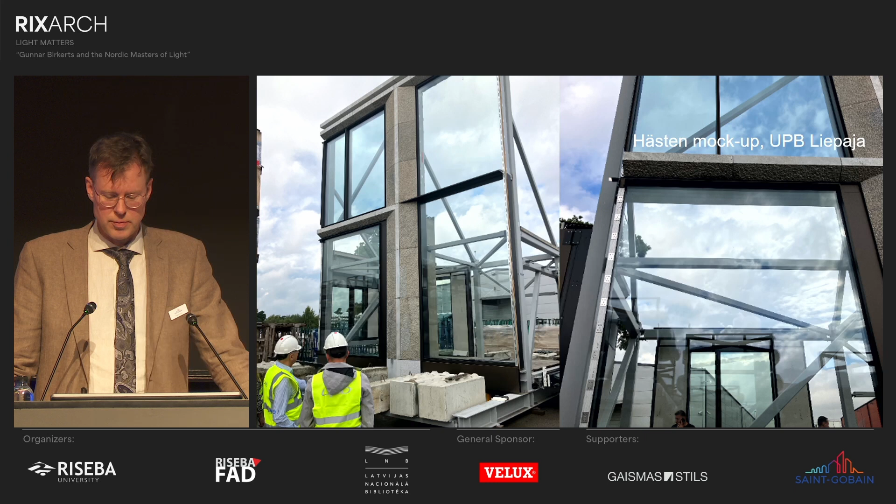So next question, can we rely on just one supplier? I mean, I worked for the same supplier for 26 years, and I get paid every month, so yes, you can.

We sell to glass processors that make the insulating glass units for the houses. And all these companies around the Baltic Sea are companies that buy our products. So you can get offers from multiple sources, even if you use just one glass supplier.

So moving on to science and number crunching. This is the not so fascinating part with not so many pictures. How do you create the combination of daylight and thermal comfort? Well, first, glass is about spectrophotometrics. What wavelengths do we transmit and which ones do we reflect back? And then you need to think about the different types of radiation.

What we emit here today is we're black bodies between -50 and +100 degrees by definition, and we emit very long wave infrared energy with low efficiency. And that's what we're trying to stop from getting out of the house.

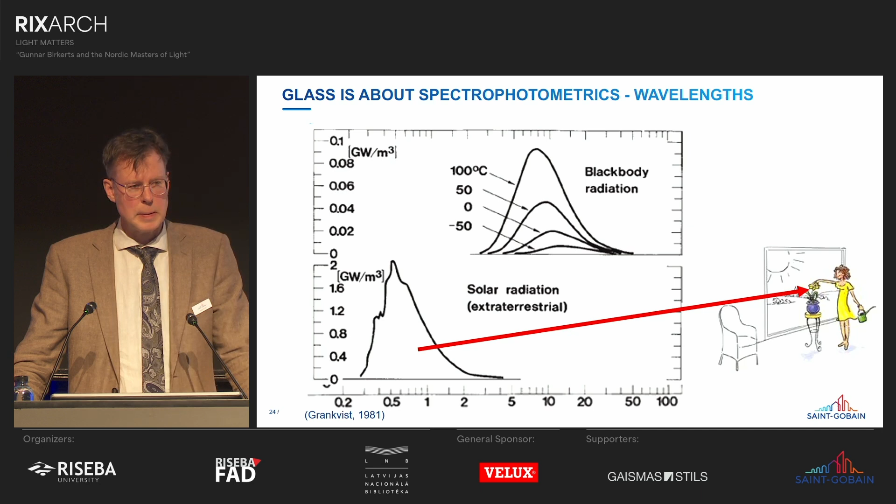What we try to stop from getting into the house is instead the solar energy, which is a black body at 5,500 degrees. More than half of the energy from the sun is invisible. It's infrared, it's heat. But it's not the same infrared as what we're emitting. So it's completely different energies, and we need to handle them differently. All the glasses that I show here reflect back this energy by 97 to 99%. So it's not really the problem anymore.

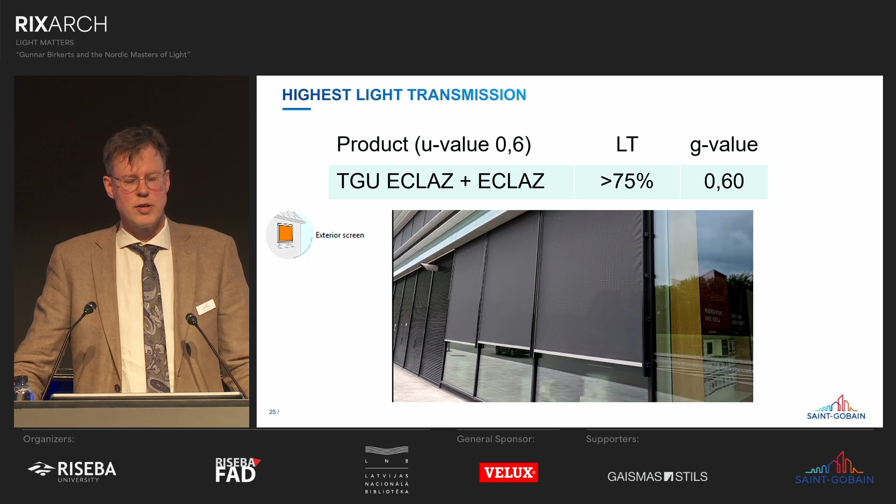If we start out by focusing on getting the highest light transmission, we're at about 75%, a triple glass unit that lets in a lot of energy. If you remember the spectral curve from the sun and compare it to the spectral curve of this glass, you see that everything goes through, and it brings really nice colors. The bad part is that you need outside shading, at least in the south, east, and west, to control the energy.

So what other solutions are there? Well, solar control glass is something that I like, as I said before. And the lightest one nowadays has more or less the same light transmission that we had in standard low-E glass some 10, 15 years ago. So that can be used, and this glass I use a lot in schools in Sweden.

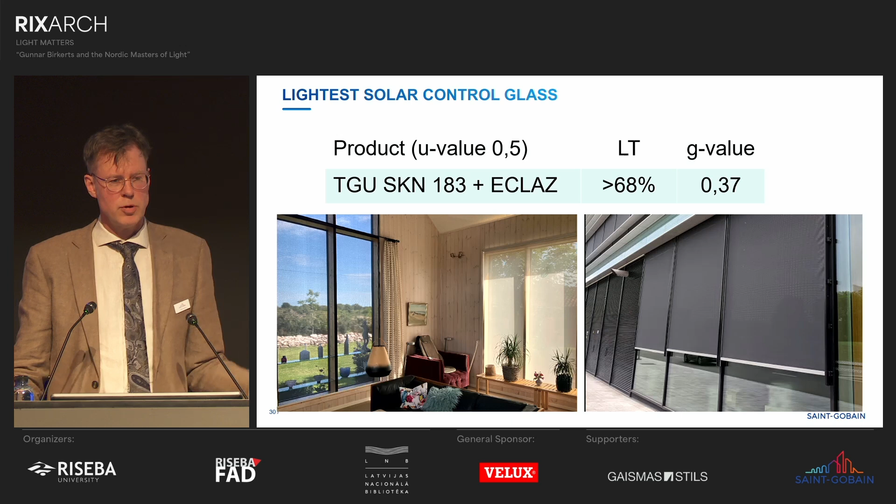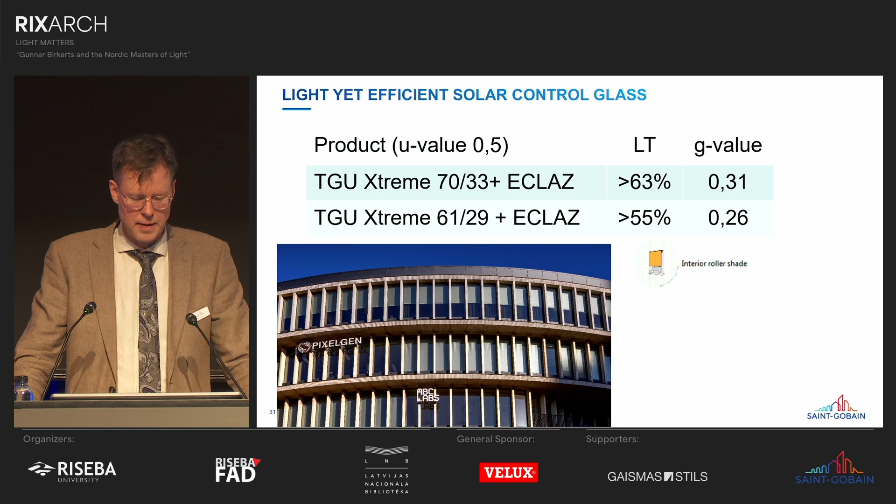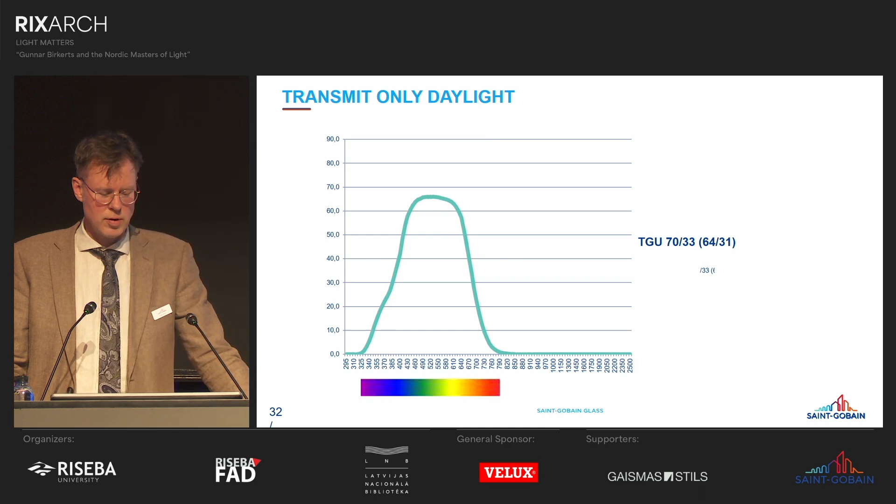And then moving to the glass plus inside shading, which I will get back to a bit. You go down further in light transmission, but you also go down a lot in energy transmission. And you create a glass, if we look at the spectral curve, where the transmission is actually only daylight. There is, of course, convection and stuff, but the way the coating is designed, it only lets through daylight. And that has an interesting effect on the operative temperature.

Here I sit the first time behind Xtreme 70/33, and I say light without heat because it's 26 degrees outside on this day. And I'm getting a reward, and I'm being interviewed. It's COVID, so it's recorded. So I have my 15 minutes of fame. I'm sitting there for like 15 minutes.

And I don't really sweat, because the infrared energy from the sun is gone, which means that I can actually endure it for quite a while. So basing facade solutions on this type of modern solar control glass makes them more resilient. So it's not like immediately when the curtain is gone, it doesn't work anymore.

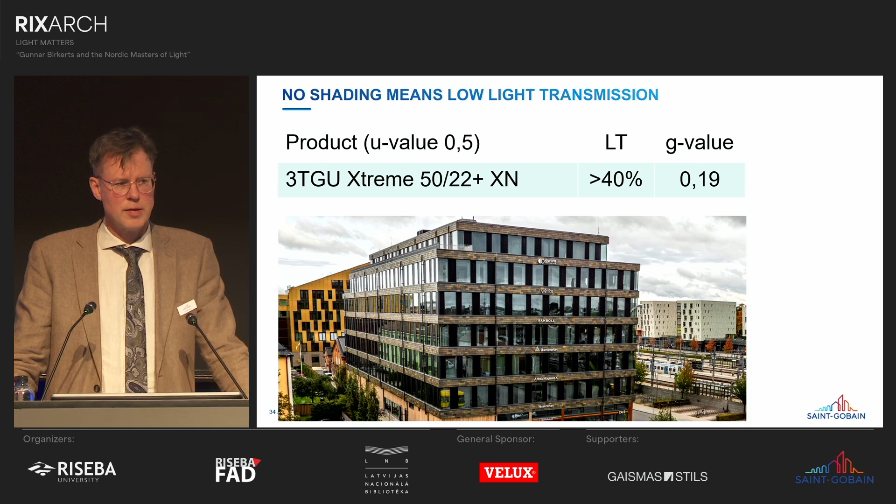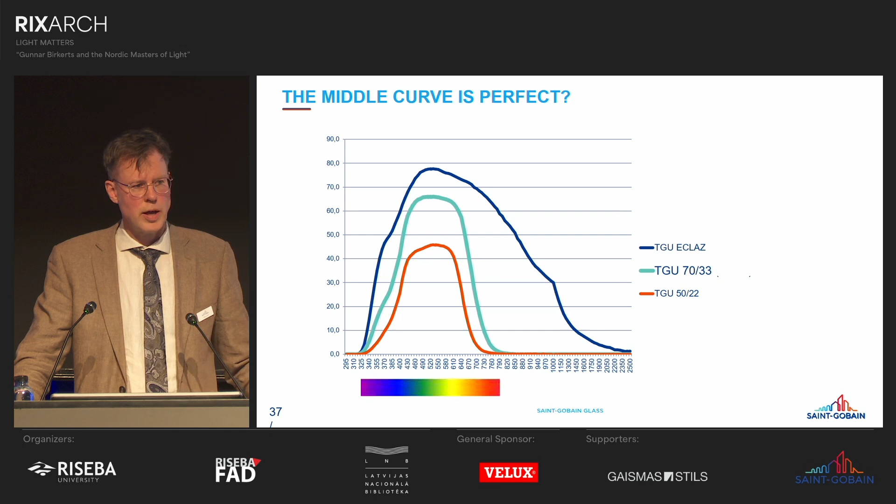By taking away a little bit of daylight, you take away a lot of heat. And then if you want to continue to take away heat, you do that only by taking away daylight. So I use only 3 things in my life, at least my working life. And it's these glasses, so you can have like a falling range of light transmission, and then you'd need different tools to control the heat.

So outside shading, exterior screen, is not big science. Anything you hang in front of a window will block out the heat. Inside shading is a bit more tricky, and I treat it in my next slide. It's been done with the help of Equa Simulation.

It's a building simulation software producer in Stockholm that produces the software IDA ICE, which some students use in Latvia. And it's also used a lot in Scandinavia, Finland, and DACH. It was actually founded back in the 1950s. The first software was written hoping that one day a computer would be purchased to Sweden. So the roots are deep, and it was made to sell these mechanical ventilations that came back then with heat recycling.

In the most modern versions, you can calculate wavelength by wavelength what energy goes through the glass, what energy is then reflected back from an inside shading. And when you do that in accordance with the European norms, you can see that you actually cut the energy transmission in more than half. There are some drawbacks to this theory, but it gives a new way of treating the energy.

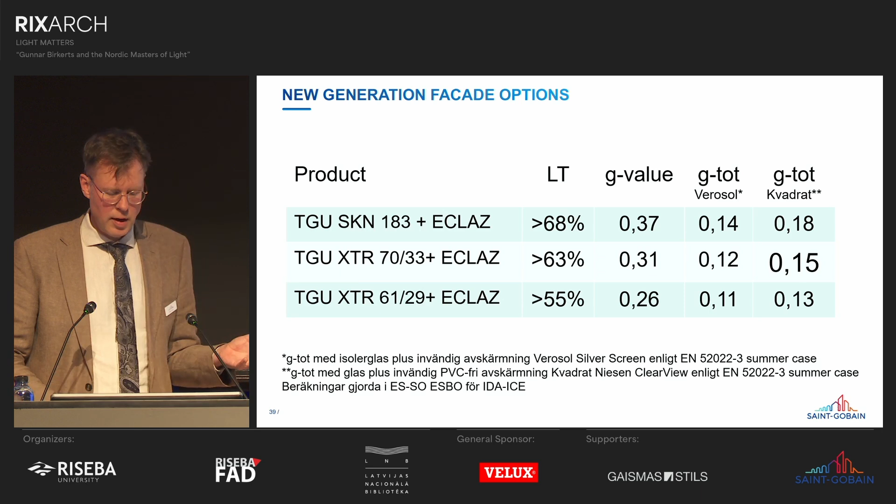And I have made it slightly bigger, the 0.15, because a consultant friend told me if you design a room that cannot sustain 15% of the energy from the light coming in, then either your window is too big or your room is too small. Also, I have two different products. They're the most efficient on the market. They're not Saint-Gobain products. The most efficient is with PVC, and then the next one is without PVC. So that's also a choice to be made.

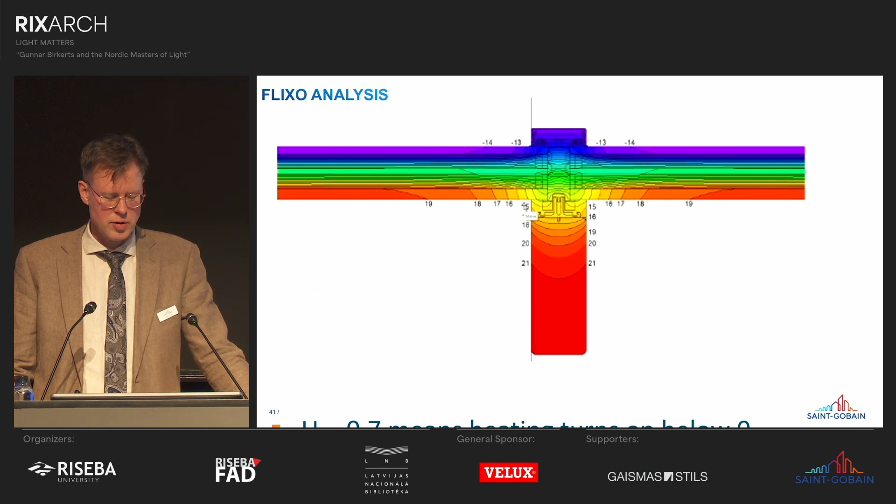Moving on, I don't see a problem in making a facade that can sustain winter cold. So thermal comfort in winter is more or less solved if you use the right combination. So I will skip to this slide to show the Magasin X in Uppsala, which went into use 5 years ago. And you can see the glass. You have either 900 millimeters wide or 1800 millimeters wide and 3 meters high. So that means that you have very little frame compared to the glass.

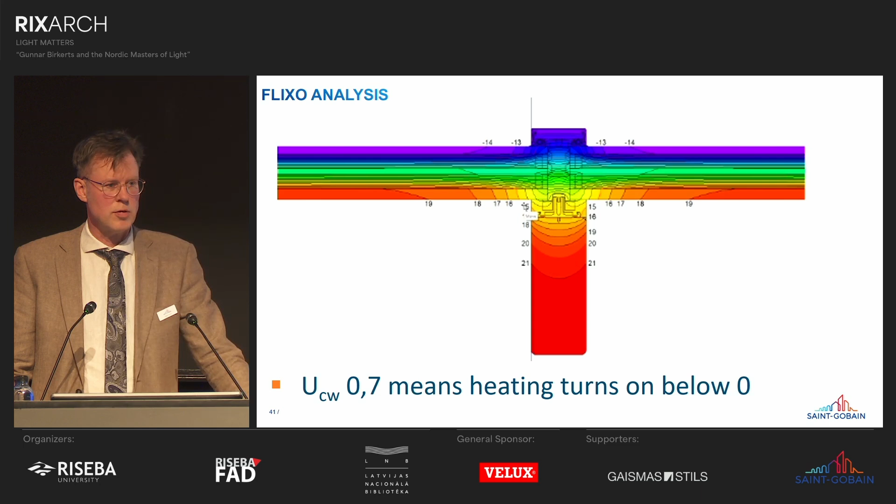And then you can make what's called a Flixo analysis to see in every point the outside temperature and the inside temperature. And this is important because when you drop very low in the U value for the facade, the heating does not turn on until it's freezing temperatures outside. So any cold bridge will become a problem because it gets the air circulating, and you might have to increase the temperature in the room by several degrees just to counter that. So cold bridges are a thing to be avoided, and small windows are not sexy.

So what does influence the window-to-wall ratio? Well, I say orientation, room size, and cooling. And I want to give a few examples to that. First, Regionens Hus in Gothenburg. It has, of course, 70-33 glass and inside shading. And it also has a cooling system based on air that can give comfortable cooling at about 20 watts per square meter.

The office space is 7 meters deep, and that's sort of a standard in Sweden, and I think international, to have 7 meters office space, 5 meters of meeting rooms and kitchens, and then 7 meters of office space. And the equation brings about a 40% window-to-wall ratio seen from the inside. This is how it's seen from the outside. Two things to notice. You don't really notice the inside shadings, and when you bend the glass, it actually becomes a lot more reflective because it reflects so much more of the surroundings.

So 40% is a bit small, 60% is better. And this is Merkurhuset in Gothenburg, which had the same prestigious award 2 years ago. I won it 2 years straight. It has what's called cooling baffles, water-based cooling, and then you can go to 40 to 60 watts without having problems with draft and stuff.

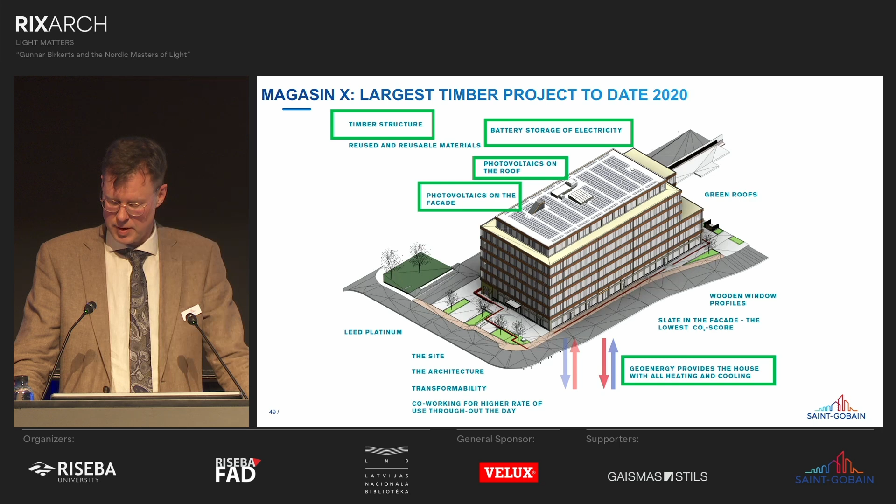What actually drives the whole system is the geothermal part. It's like 30 holes, 350 meters deep. So they take care of the heating in the winter in a quite good way. But they also help out in the summer. And here's a bit of a complex diagram where you think surface. So the surface in the outer circle is consumed energy. And here you see consumed energy for cooling. Ooh. The inner circle is purchased energy.

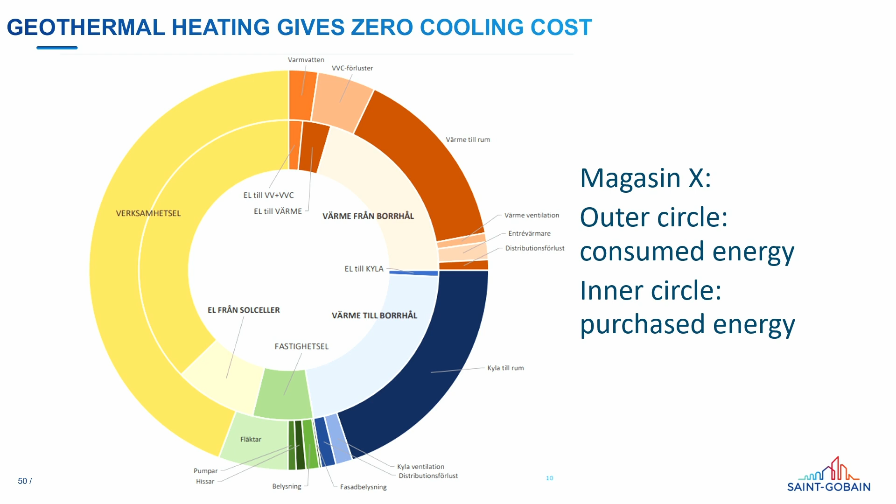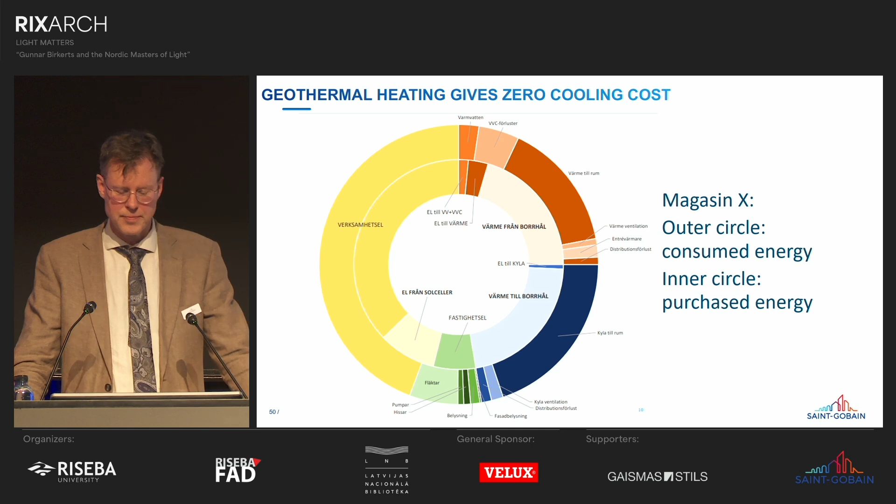So the building integrated photovoltaics help, but also the geothermal heating, because you bring up cold water in the summer and cool the building. So here is actually purchased energy for cooling. So there are ways of getting to cooling, and we need cooling in buildings today because we cannot only rely on nighttime cooling. For Magasin X, since the office landscapes are actually 12 meters deep, you can have a fully glazed facade. So do we always have a fully glazed facade?

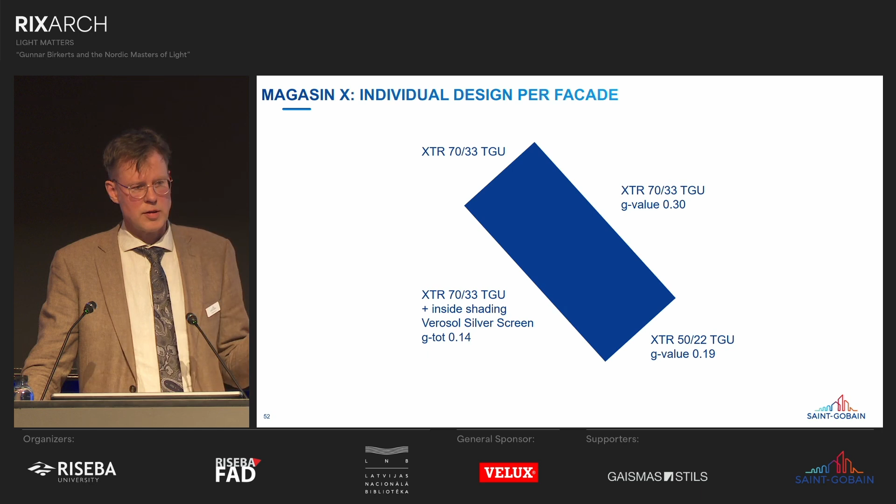For this building, there are individual solutions per facade. Northeast and northwest managed with just the glass. Southeast managed with just a very dark glass, and the combination of glass and shading is to the southwest. But what also happens is that while it's fully glazed more to the north, to the south the window-wall ratio goes down to 67%. And that is to not admit too much heat into the building.

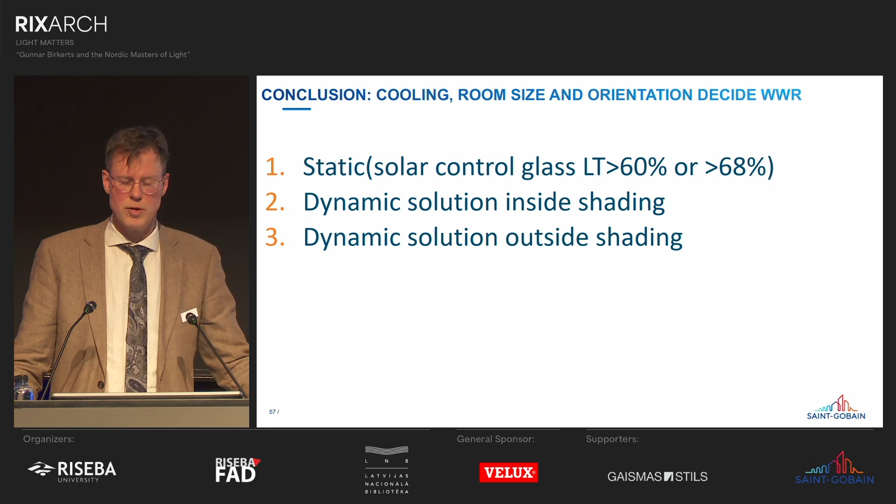In conclusion, the cheapest solution for a facade is to have a static solution with light solar control glass. And then the second cheapest, best for me, is a dynamic solution with inside shading and solar control glass. And if your room is too small or your window is too big, then you can go to outside shading. Quickly moving from low-carbon design to low-carbon products.

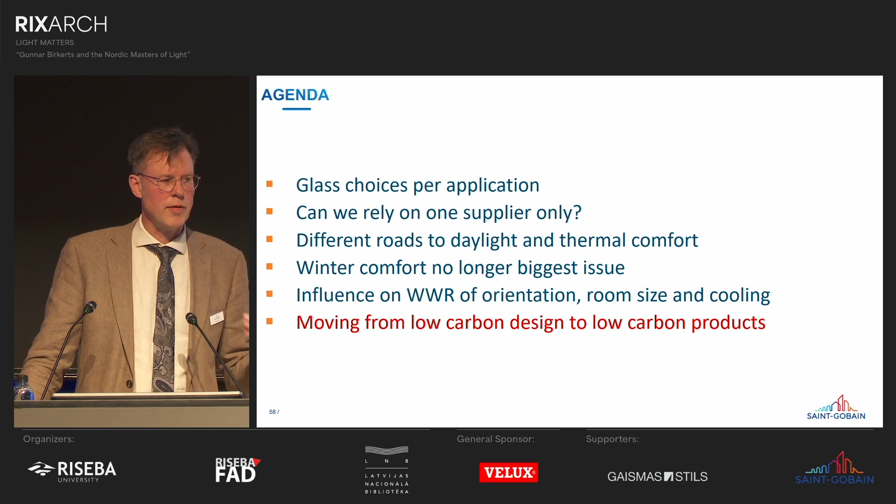Flat glass can only be made from old flat glass. And containers and bottles, we hand those in. They're remelted into new bottles. But flat glass is too cheap and too difficult, so it's all going to landfill today. So that means that we have a higher carbon footprint in flat glass than in bottles. And we want to change that. So we have developed a product where we can use some 70% of old glass, because then your melting point goes down, your need for primary material goes down, your carbon footprint moves down.

So by going from a maximum of 1/3 of broken glass to 2/3 of broken glass, we can save a lot on the carbon footprint, 42% for ORAÉ so far. And we've sort of exhausted all the cutoffs that we get from producers and what we produce ourselves. So we want to produce everything in this way, but then we need to start collecting, and we have several programs going for that, to collect old windows to make new glass. So that's sort of in the cards for the future.

By 2040, 2045, we need some 850,000 tons of end-of-life cullet every year. It's realized already today. So Habitat 7 in Gothenburg is a project where after the steel and the concrete was gone, the big source of CO2 was glass, and then that was also reduced with ORAÉ. And that's my final.